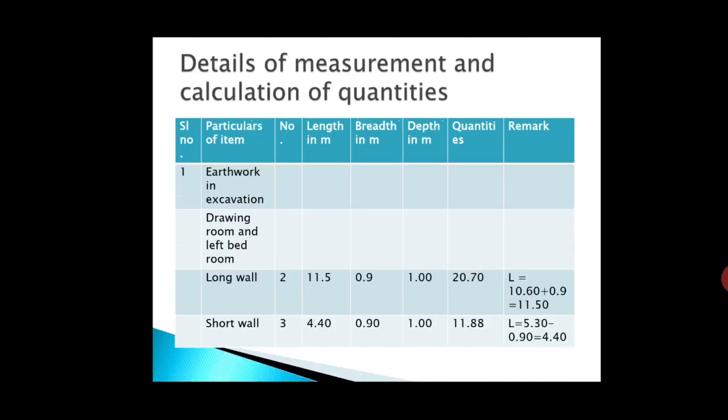So in the details of measurement form, write down under the same item, that is first class brickwork in foundation and plinth, write down front veranda and front wall, that is the long wall of the veranda. Then we will move to the plan.

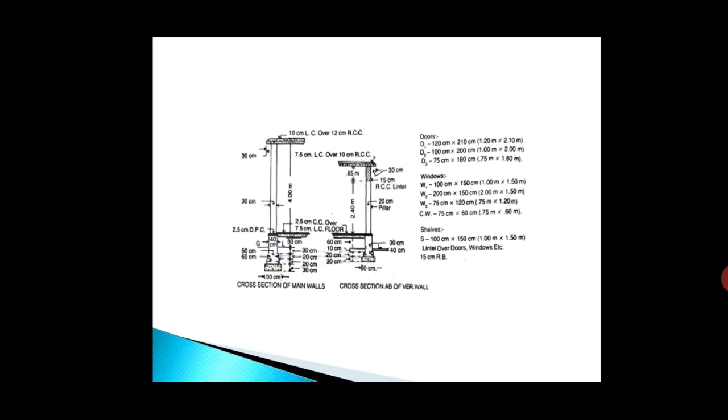So this is the front veranda part, and here this is the front wall, of width 20 centimeter. For the calculation, this 20 centimeter front wall is connected to a 30 centimeter wall on one side and to a 20 centimeter wall on the other side. For the sectional detail we will refer this diagram. This is the cross section AB of the veranda wall.

Now we will go for the calculation of first footing. Here in this cross section there is only one footing of 40 centimeter width, and above that there is a plinth wall of 30 centimeter width. So first we will calculate the quantity of first footing.

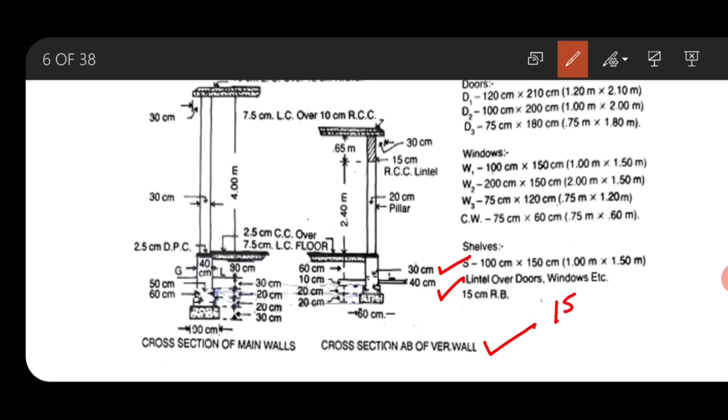Width of first footing is 0.4 meter, and thickness of the first footing, mark here, is 20 centimeter, that is 0.2 meter. And as this front wall is connected to a 30 centimeter wall on one side, we have to also refer the cross sectional view of the main wall.

So, as in the case of earthwork in excavation, here also you have to check which work of this main wall is done at the level of this 20 centimeter wall. Refer the diagram: the first footing is done at a depth of 10 centimeter from the ground level. This one is the GL, and the first footing work is carried out at a level of 10 centimeter below the GL.

Now you have to refer to the main wall, that below 10 centimeter of the GL which work of this 30 centimeter wall is completed. Refer this diagram: this one is the GL, and at a depth of 10 centimeter from the GL there is the presence of plinth wall which is of width 40 centimeter.

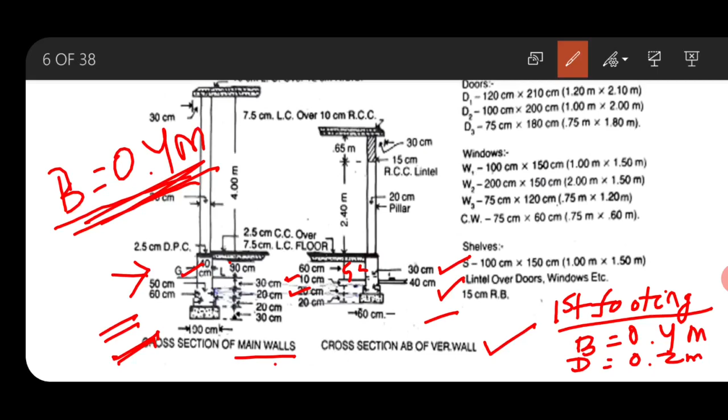So at the level of first footing of the veranda wall there is the presence of plinth wall of the 30 centimeter wall. This width will affect the net length. The width of the plinth wall is 0.4 meter, so this width will affect the net length, and half of this width is to be deducted from the net length of the veranda wall, from center to center length, as this work has already been completed.

This wall has already been completed under the first part. Now we are doing the calculation of first footing of the veranda wall. At this level there is the presence of plinth wall of the 30 centimeter wall, and this work has already been done. Therefore, in order to get the net length from the center to center length of the long wall of the veranda, we have to subtract half of this width, that means 0.4 by 2, and add.

So net length will be center to center length of the long wall minus half of the plinth wall, as this work has already been completed, and add half of the width of the first footing for this wall, that is 0.4. Clear?

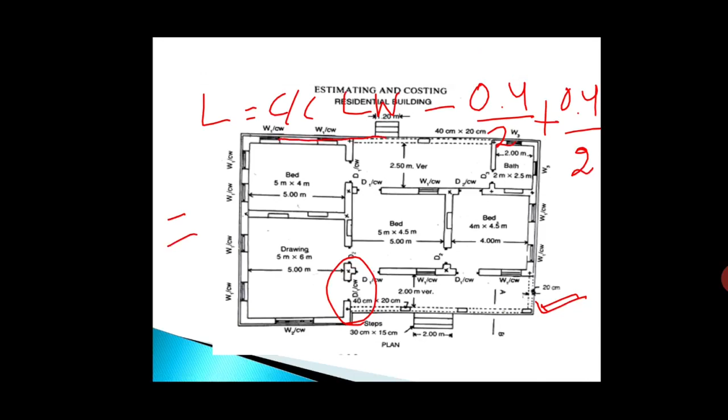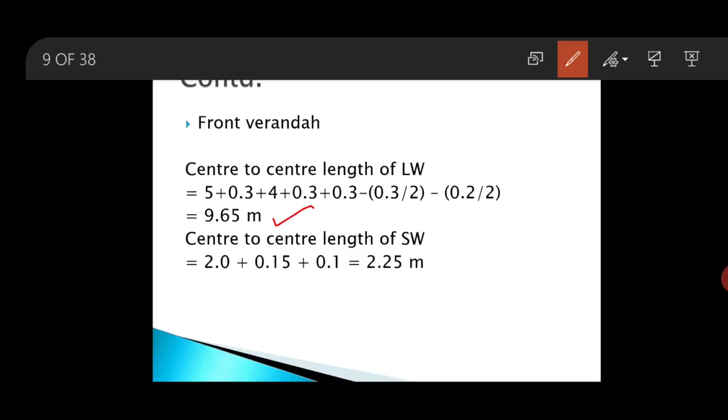Now what is the center to center length of the long wall for this veranda? For front veranda, the center to center length of long wall is 9.65 meter. So 9.65 minus 0.4 by 2 and plus 0.4 by 2. This is the length, and breadth and depth are here. We have already written the width of the first footing of the veranda wall, that is 0.4 meter, and thickness is 0.2 meter.

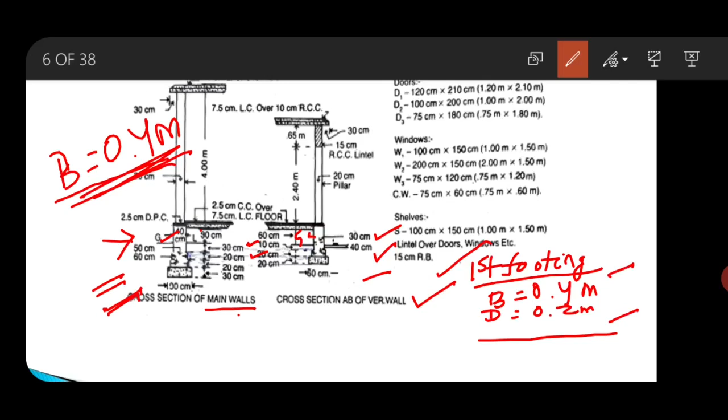So this one is the first footing, number 1, and length: from the center to center length of 9.65, you subtract 0.4 by 2, width of the plinth wall, and add 0.4 by 2, width of the first footing for the veranda wall. So the net length is 9.65, width is 0.4, that is the width of the first footing, and depth of the first footing is 0.2. By multiplying all these, we get the quantity as 0.77 cubic meter.

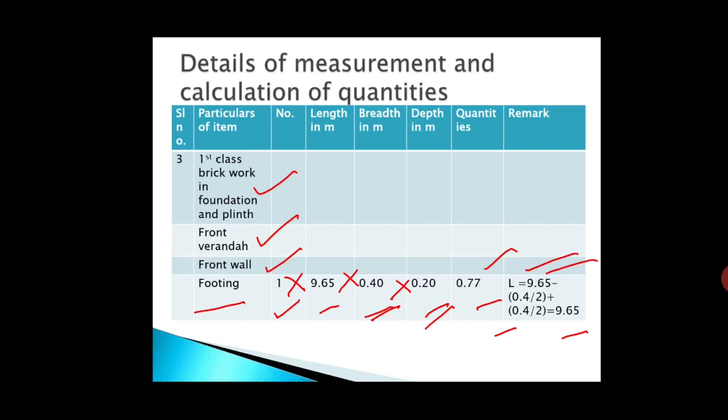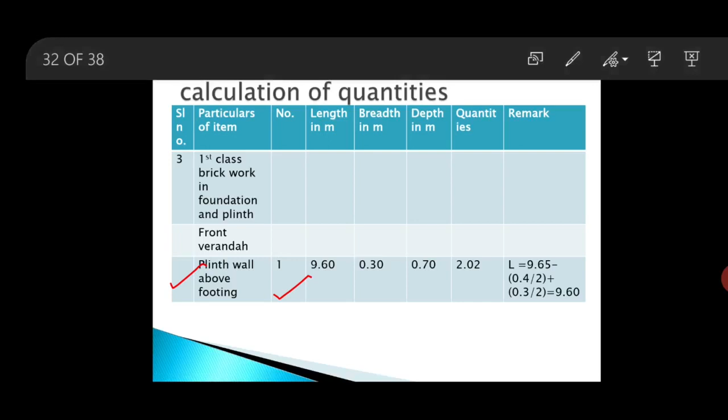Above the footing there is the plinth wall, so write down plinth wall above footing, number will be automatically 1. Then what will be the length? In the cross sectional diagram, this plinth wall is of width 30 centimeter, that is 0.3 meter, and depth of plinth wall is 60 plus 10, that is 70 centimeter, 0.7 meter.

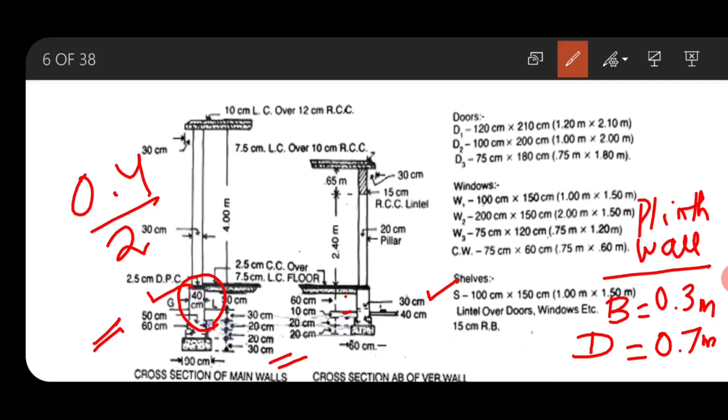We have to again check which work of this wall is present at the level of plinth wall. At this level, 40 centimeter wall is present of the main wall, so this width is to be subtracted. We have to subtract 0.4 by 2, as this work is present at the level of plinth wall of the veranda.

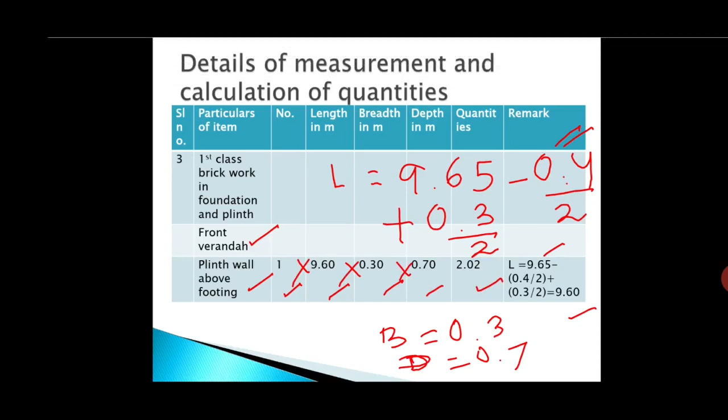So in plinth wall calculation, front veranda, this is plinth wall. Number is 1, and center to center length is 9.65. From that we subtract half of the width of the plinth wall for the 30 centimeter main wall, and add 0.3 by 2, the width of the plinth wall of the veranda wall. So the net length comes out as 9.6. Width of the plinth wall was 0.3 and depth is 0.7, as observed from the cross section of the veranda wall. Multiplying these four values gives the quantity as 2.02 cubic meter. Next we move to the front veranda short wall.

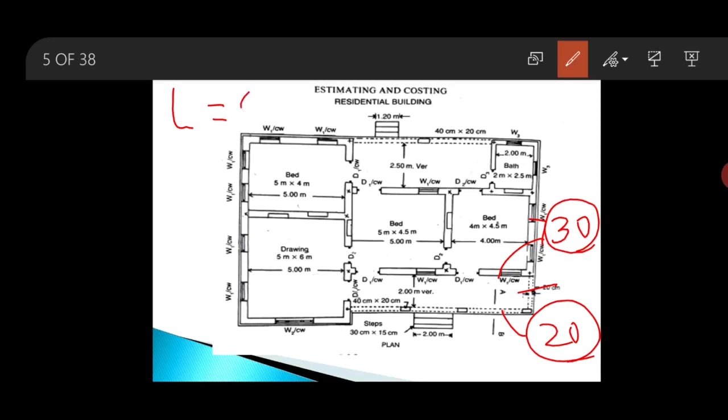This is the short wall, connected to a 30 centimeter wall on one side and a 20 centimeter wall on the other side. So in order to get the length of the brickwork along the short wall for the footing, we subtract from the center to center length of the short wall half of the width of the plinth wall for the 30 centimeter wall, and half of the width of the footing of the 20 centimeter wall. This gives you the length.

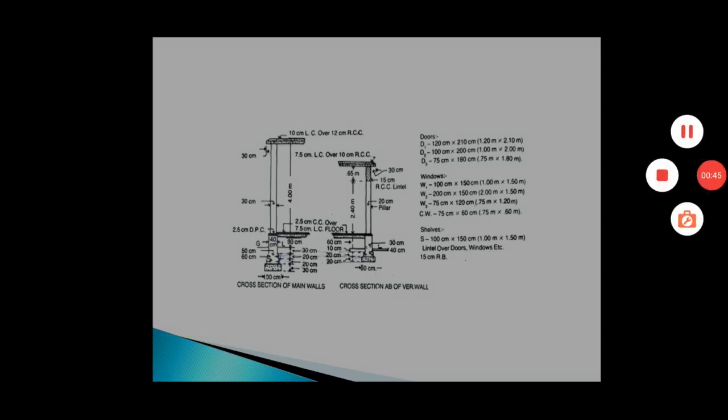So this is your short wall, front veranda short wall footing. Number of short wall is 1. In the remark column, write down the center to center length, that is 2.25. From 2.25 subtract half of the width of the plinth wall of the 30 centimeter wall and half of the width of the footing for the 20 centimeter wall. This gives you the length as 1.85. Width of the footing of the veranda wall is 0.4 and depth is 0.2. Multiplying these four gives the quantity as 0.15 cubic meter.

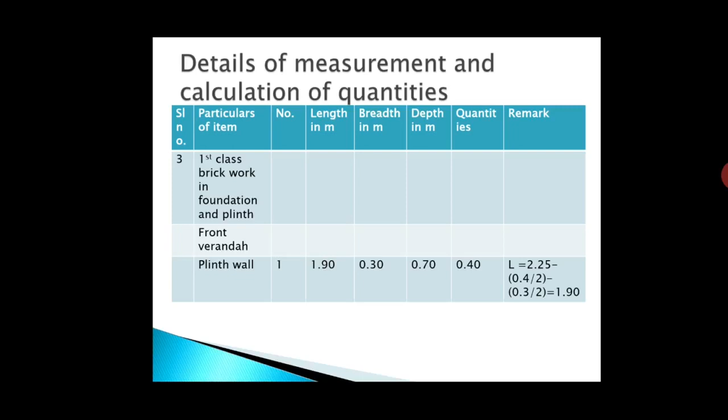Next we move to the plinth wall along the short wall. The width of the plinth wall is 0.3 for the 20 centimeter wall. From the center to center length, that is 2.25, we subtract half of the width of the plinth wall for the 30 centimeter wall and half of the width of the plinth wall of the 20 centimeter wall. In the length remark column, the length becomes 1.9, breadth of the plinth wall is 0.3, depth is 0.7. Multiplying these four gives the quantity as 0.4 cubic meter. So our front veranda part is over.

Then we move to the back veranda. As you know, the long wall of the back veranda has the same dimension as that of the long wall of the front veranda, so the calculation of the long wall remains the same. First write down long wall, then footing: number is 1, length is 9.65, breadth is 0.4, depth is 0.2. Total quantity is 0.77 cubic meter, for the footing. Then for the plinth wall, this value also remains the same as the front veranda.

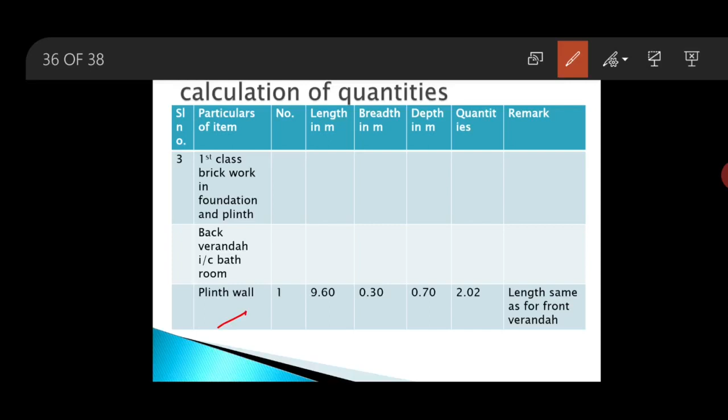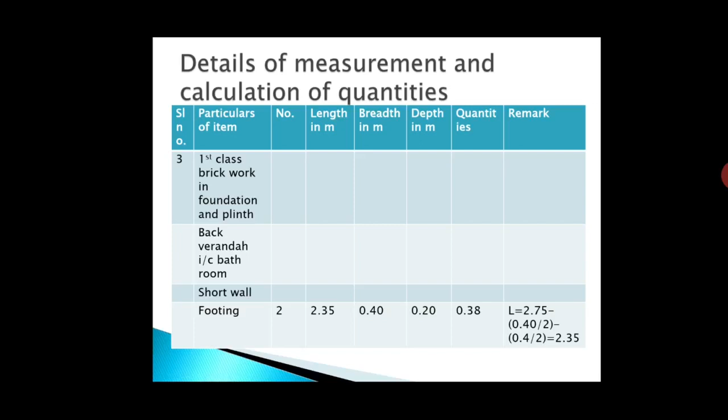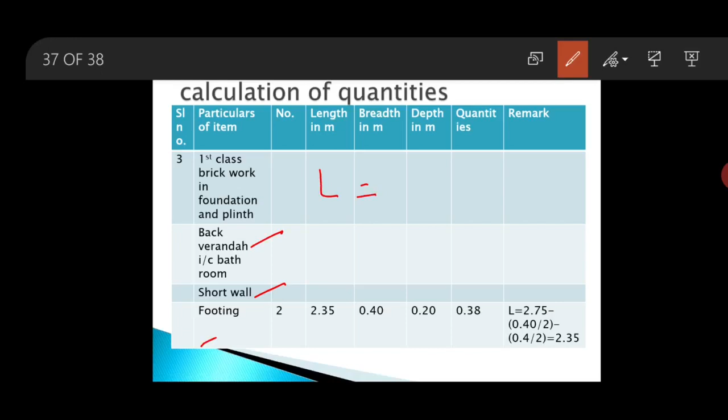Next we come to the short wall, but here there is variation in the center to center length. Write down back veranda, short wall, then footing. The center to center length is different, that is 2.75. For the footing calculation, from 2.75 subtract 0.4 by 2 for the 30 centimeter wall and 0.4 by 2 for the footing of the 20 centimeter wall. This gives you the length as 2.35, breadth is 0.4, depth is 0.2. Multiplying all this gives the quantity as 0.38 cubic meter.

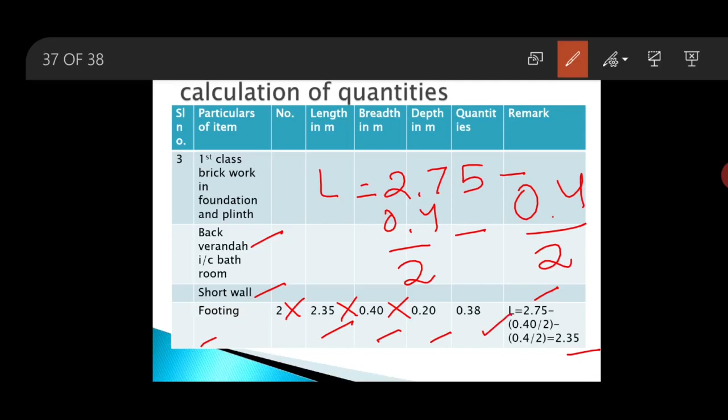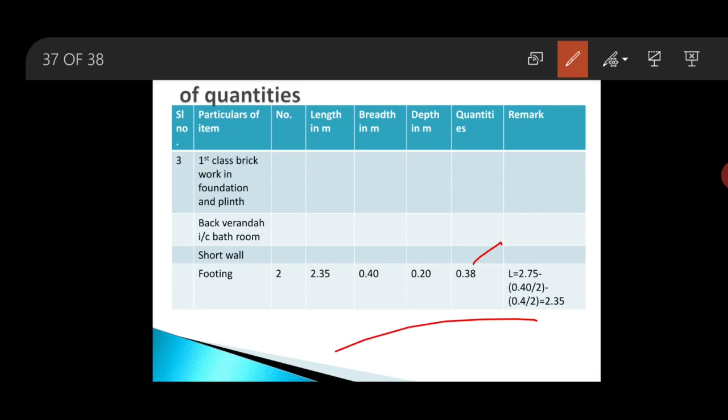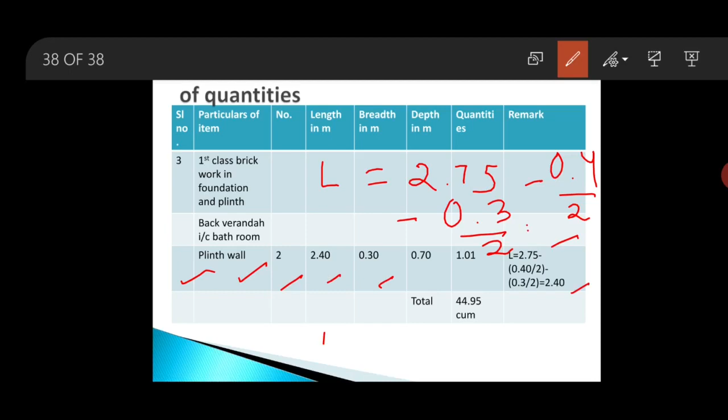We have completed the calculation of footing along the short wall. Now for the plinth wall: the number is 2, the length is from the center to center length of the short wall, subtracting half of the width of the plinth wall of the 30 centimeter wall and half of the width of the plinth wall of the 20 centimeter wall. As we are calculating plinth wall quantity, we subtract 0.3 by 2, so the length will be 2.40. Breadth is 0.3, the breadth of your plinth wall, and depth is 0.7. Put the dimensions in the respective columns, then multiplying all four gives the quantity as 1.01 cubic meter.

With this we have completed both parts, the front veranda and back veranda. Now we add all the values to get the total quantity, that is 44.95 cubic meter. That is all for today's class. In the next class, we will go for the calculation of the next item of work, that is DPC. Thank you.